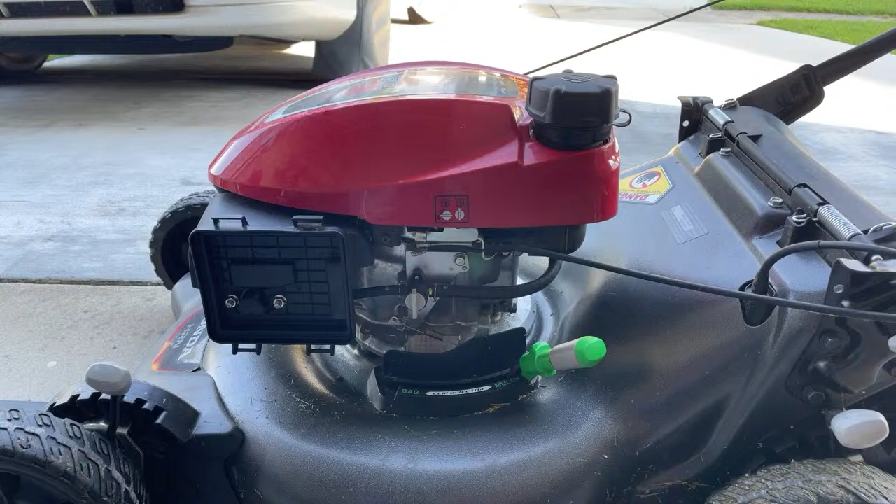Anyway, so here we have, I believe it's a 2020 Honda lawnmower. The engine is a GCV170. This is the engine, brand new for 2020 and after for Honda. It's the larger, slightly larger engine than the 160. It's got a bit more horsepower to it.

So this mower is the HRN216. That's going to be important a little later, as well as the model number I got here. And this is important too to keep in mind: HRN216VKA. That's going to be important because I'm going to show it to you a little later.

This is the old original carburetor that came with the mower. This is the one I drilled out with little tiny micro drill bits I found on Amazon, which solved the problem but made new problems. I think I drilled them out too well, just a bit too big, and now the whole thing is running too rich.

Now the other thing I need to do is take off this bowl down here on the bottom, if I can. I need to find a wrench to pull that bowl off, just to make sure there's no other gas in it. That's something else I didn't plan on, that's gonna take a little while.

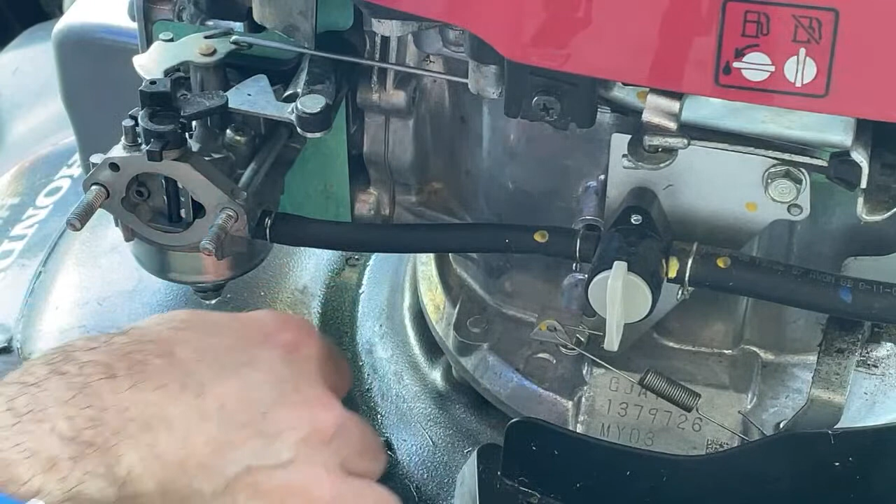I was trying to start this earlier before I started this video. I was trying to get all the gas out of it, run it out of gas, so it wouldn't be pouring out everywhere, but it would not start for the life of me. Not a clue, well, not really knowing why. It shouldn't be too much wrong with the gas.

I got it all sweetened up really well with various different cleaners and other kinds of lubricants. I was trying to get the spark plug and the piston all cleaned up from the built-up carbon and running rich. So well, maybe I did run it out of gas, there's really nothing in there, so you can see what's wrong.

Oh, I thought I lost you there. Okay, so there we go, couldn't see anything. Anyway, so that's the bowl I took off, there's really nothing in there, so maybe it did run out of gas. There wasn't really much in there, so maybe that's okay.

Anyway, now I need to get some pliers and take that off and then remove these. If I remember right, I thought I had a spring on here somewhere, a different spring someplace, I thought. Now I don't know what happened to it. There was a tiny spring somewhere, I remember there was a tiny spring that went to one of these, and now I don't know what happened to it.

I thought for sure there was a tiny spring in here. Oh, there it is, oh I see it now. Okay, so you can't see it, but there's a wire spring attached here. I thought that wasn't there, I couldn't see it.

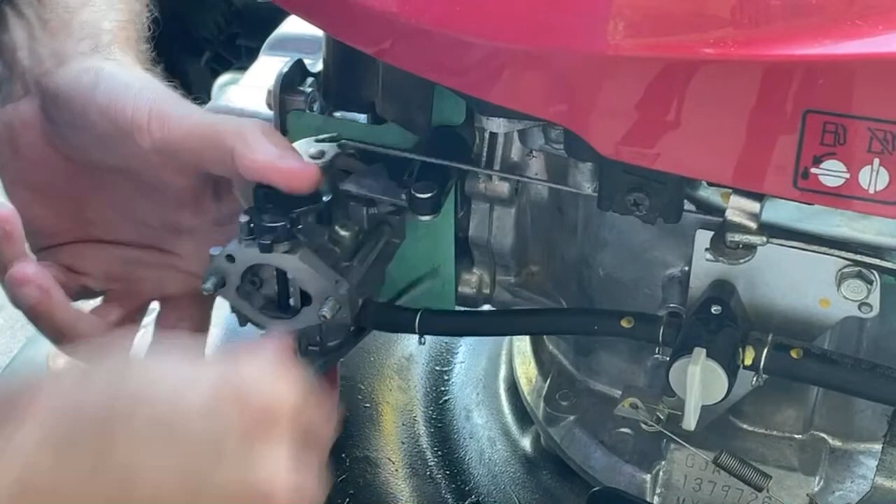Just wanting to, doesn't want to come off of there. But that's why this is a long walkthrough video, where you do have that time shift to fast forward through some parts, because it's probably going to take a long time. Anyway, so maybe I'll get that off here a little bit later.

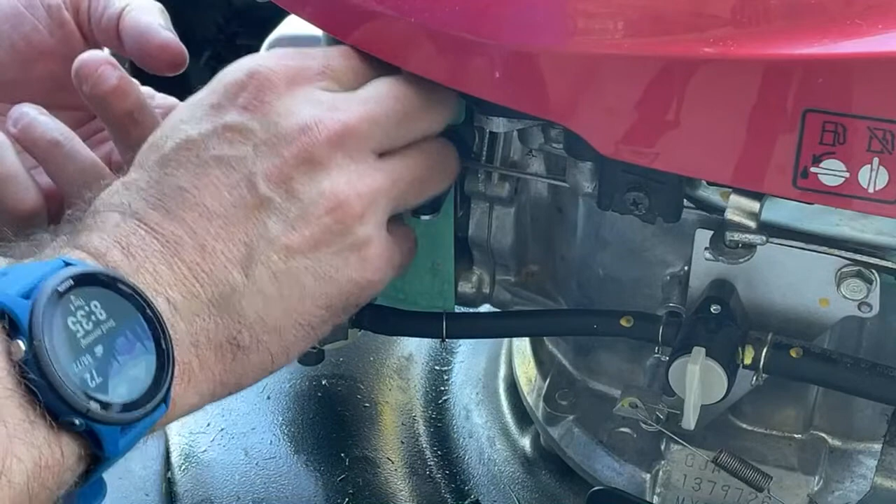Meanwhile, I need to remove this tiny little wire spring, if I am able to without bending it up too much. But I guess the other thing I can do is I thought maybe I could pull this off, but maybe I can't do that really well. So I got these other things on here.

Finally get that off. Now I can have a bit easier time getting that off, which I don't know if you can see anything. I guess you can, maybe a little. And this is not the best setup for trying to do a video. I don't have all of the necessary complicated camera gear. I'm just using my iPhone.

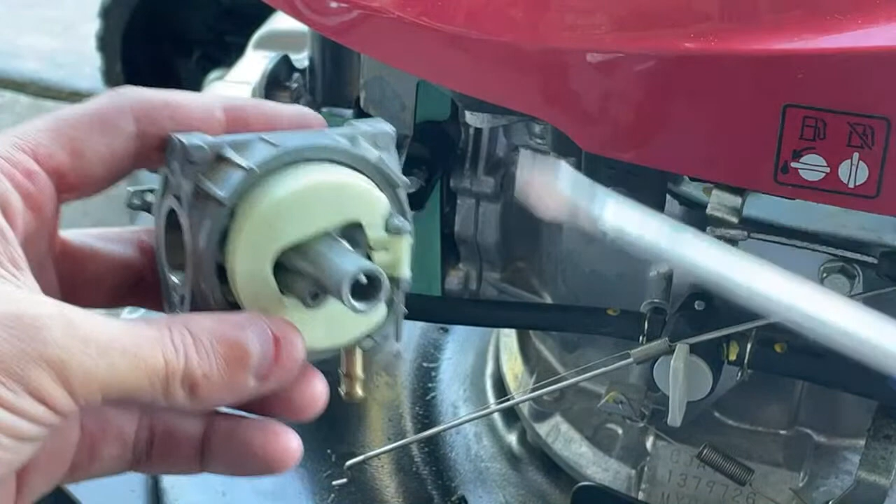So I took those off. Now, let's see, you saw me take that off. So here is the original, and I was gonna save this because I know that's good. The main jet, the emulsion tube I guess they call it, is way down there. So I was gonna take this, if it will fit, or this screwdriver here,

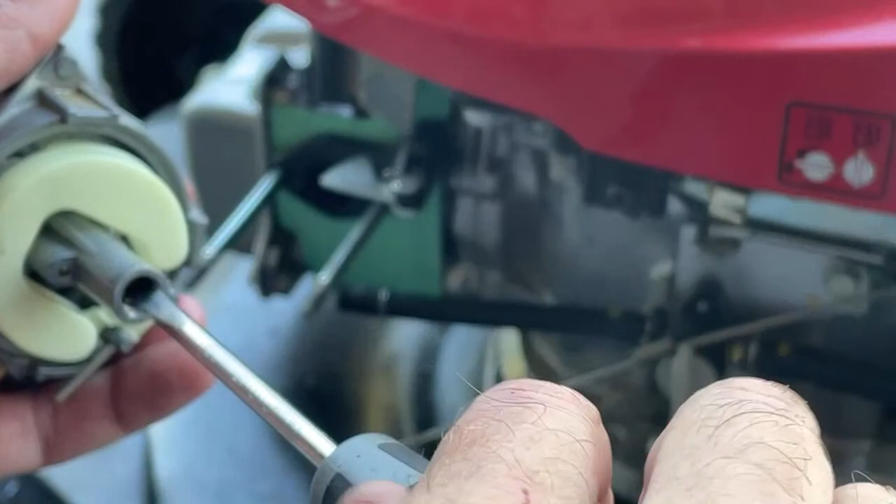And let's see if I can unscrew this and try to find out, if I'm able to find out, what the original main jet is. And I found out by looking on the new parts, that the number is stamped on the side. And I will try to show that here in a moment.

Maybe if you can see anything. You may not be able to see anything, it's just so bad. But just on the side here, on this main jet for this emulsion tube here, it goes through this main jet, and there should be a number stamped somewhere on the side.

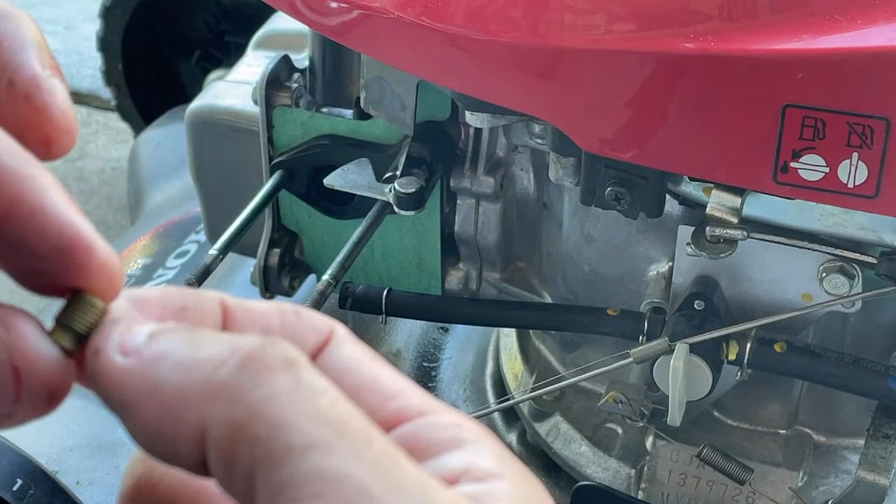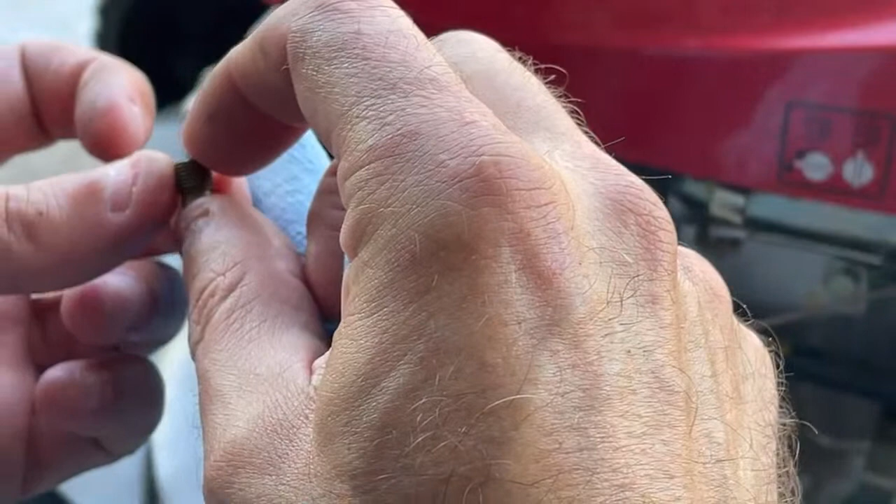And I may have to look at it in really bright light, and I may have to clean it up some. But I was wanting to see, I may have to clean this up with carburetor cleaner so I can see it. But I was trying to figure out what's the original jet number on here, and I may have to look at it in the sun.

But the other thing I can do too is I can look on the brand new carburetor I bought, which I'll show you. I can take that jet out and find out what the number is on there. But let's see if maybe I can take it outside with some better light.

But what I was talking about earlier is with this main jet, I think it's too small. I think they put in too small of a main jet, and I will show you how and why that is here in a little while. I think they got too small of a main jet where it's able to drop gas, but because it's too small, it's not able to keep it going, and that's where you have constant revving up and down that never quits. I don't know if it's any better or not.

But let's see if I can take you out here into the sun. Let's see if there's any way I can see. I may be able to see anything. Can't see anything at all, can you? Let's see.

I'm trying to find out if I can find out what the original jet number is on this. On there, I might be able to just see it so faint. Still can't see anything, can you?

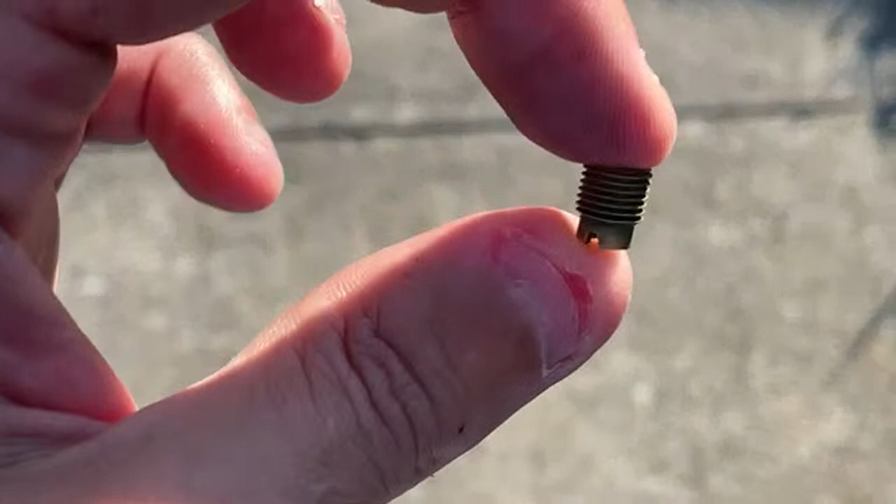So, sorry about that. Anyway, I think it's stamped, because it's like I'm trying to look at it with my glasses, but then you can't see nothing, but that's YouTube for you. Anyway, I think it's stamped on there somewhere, and I can't tell what it is.

I'm assuming this is a 65 jet, and if it is, then it's going to be too small and too tiny. It's like I have to take pictures of it and zoom in super close to see what the jet number is. So I can't see it, at least not from here.

And I know you're looking at my really bad chewed up thumbnail. I guess that's my cigarettes for you. I chew my fingernails really bad, and chewing my fingernails and chewing up my thumbnails, it's kind of like, I suppose, better than cigarettes, I guess, for me anyway.

But anyway, I can't see even in the sun. I can't see what that is, but I think it's right in there somewhere.

Right in there somewhere is the original jet number, and I can't see for the life of me what that is. But we're getting to be too long trying to find out, so I'll have to look at it later. I might have the same issue looking at the new carburetor trying to see what that original jet is too.

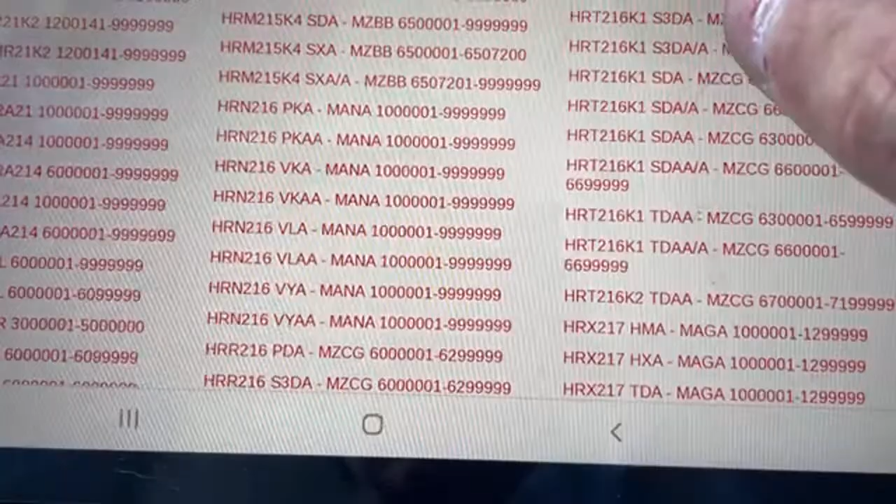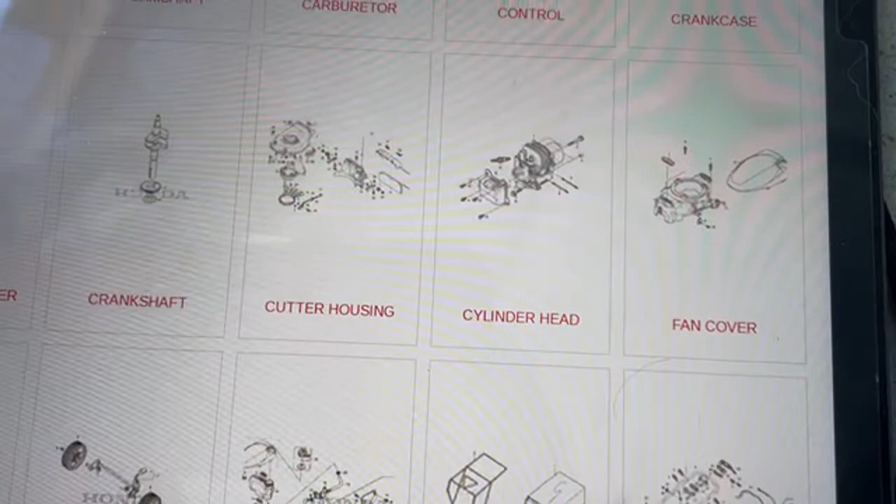In my situation, I have an HRN216VKA, so I'll choose that one. And here you have all the different parts you can get.

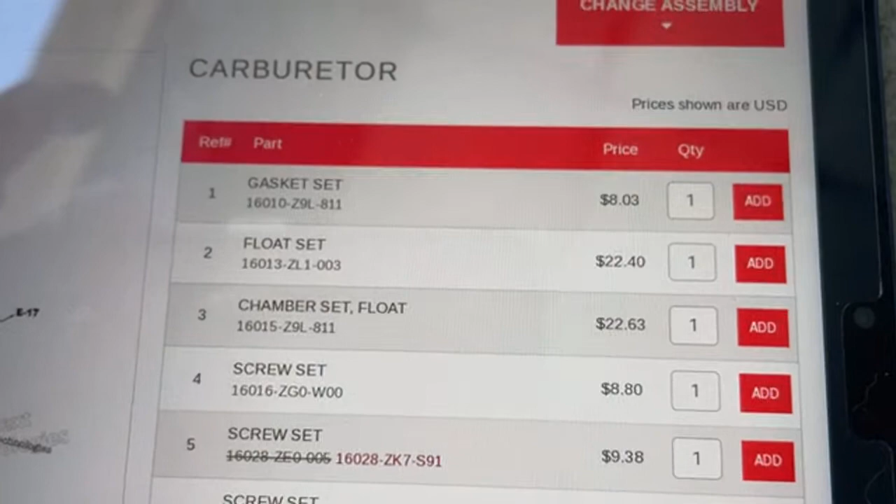So what I did was go to Carburetor, and here's the diagram for your lawnmower carburetor, with all the different individual parts you can get. I believe you can also buy the whole entire carburetor, that's what I did. Here's the carburetor assembly, that's what I bought.

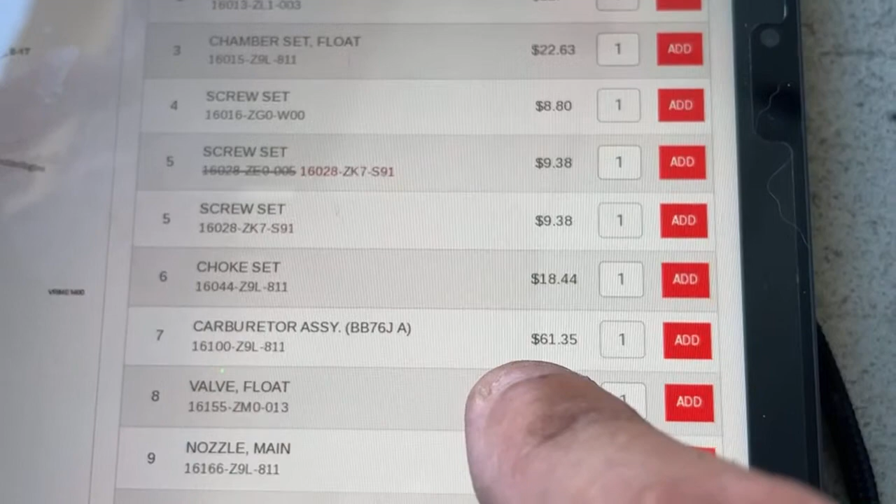At the time I purchased it, it was well over $70, but it's gone down in price a little bit. At one time it was maybe $40-something. Anyway, you have the whole entire carburetor you can buy.

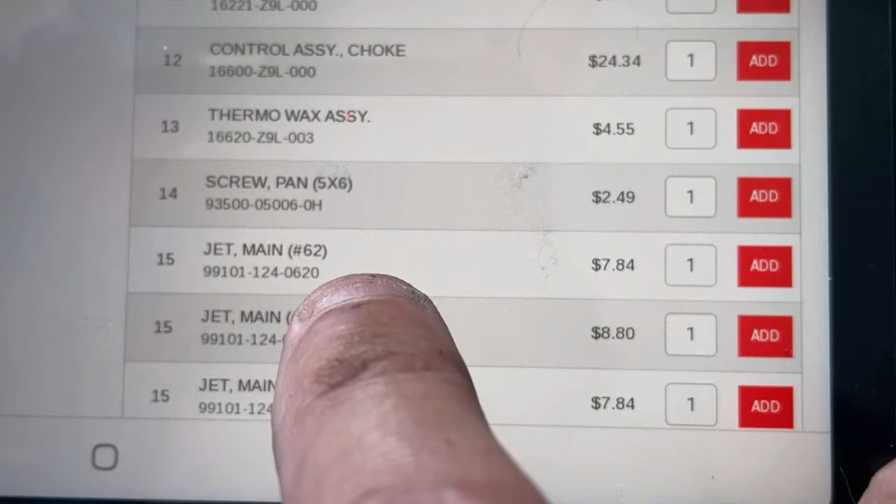Then you have the nozzle main, and then these main jets here. I mentioned 65 before, but I had that wrong. What I meant was this main jet 62, which I think is the smallest one, and I think that's the one they have originally in the carburetor, 62. I can never talk right.

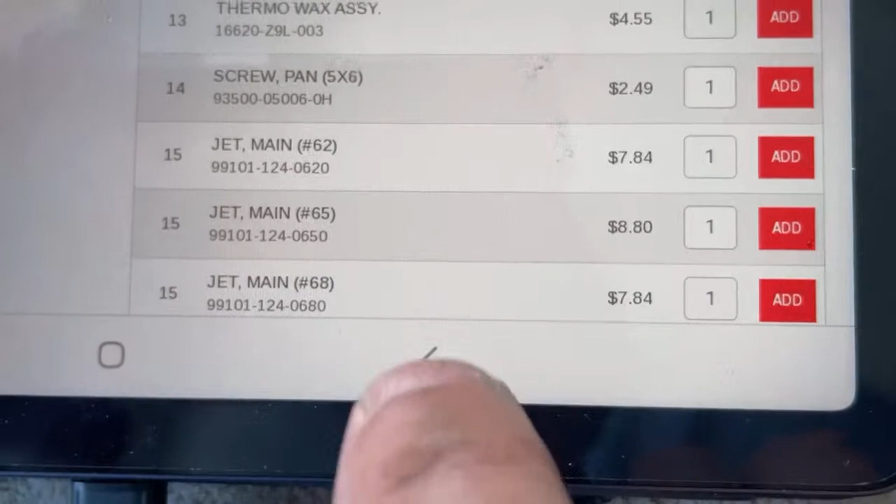I think that's too small, but I think that's what they have in the carburetor originally, 62. So what I was going to do was go to 65 and try it. I was trying to verify to make sure it really is 62 in there to begin with, but I can't see anything.

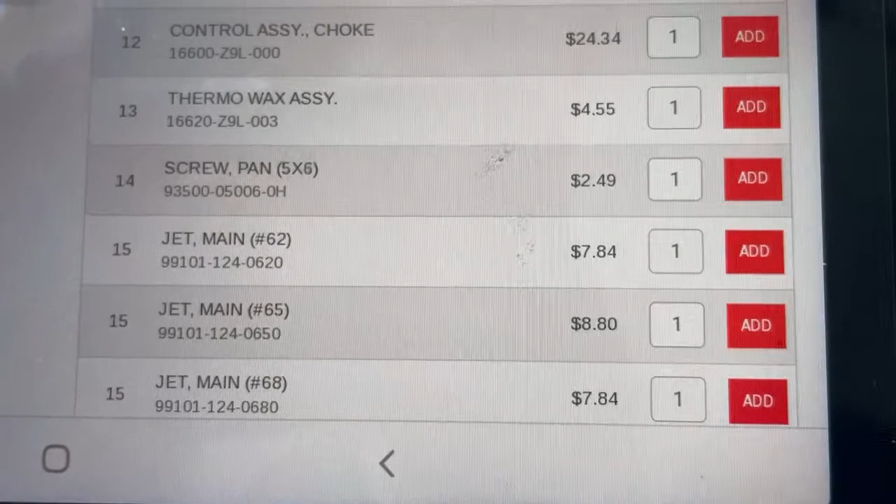So I was going to go with 65 and see if that will work, and if not, I can try the next bigger one. You can buy these three different individual jets for your carburetor, so maybe you can have much better luck getting your Honda lawnmower running without revving and fouling up the spark plug.

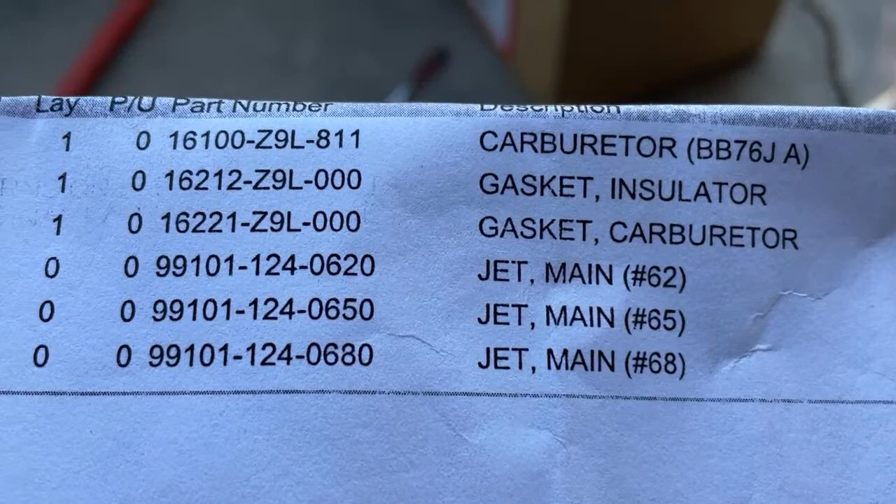So here are the jets I purchased. I purchased all three in case I needed everything. I've got gaskets, the whole carburetor, all those other things.

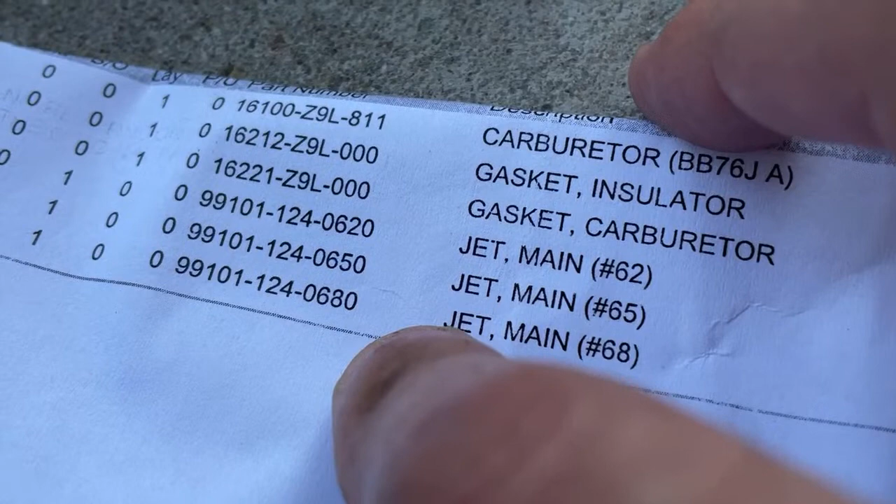So this is the really small little jet. You can line this up, line this number up, so you know which one you have.

So what we have here is number 62, that's the small little one, so I didn't want to start with that. I was wanting to start out with 65, the medium one. I'm thinking that's what I will need to have this run without revving up and down.

Anyway, so we've got these assorted jets I can try. I have the new gaskets I can put in there. It's always a good idea to put new gaskets in. Now it seems like I might be missing one.

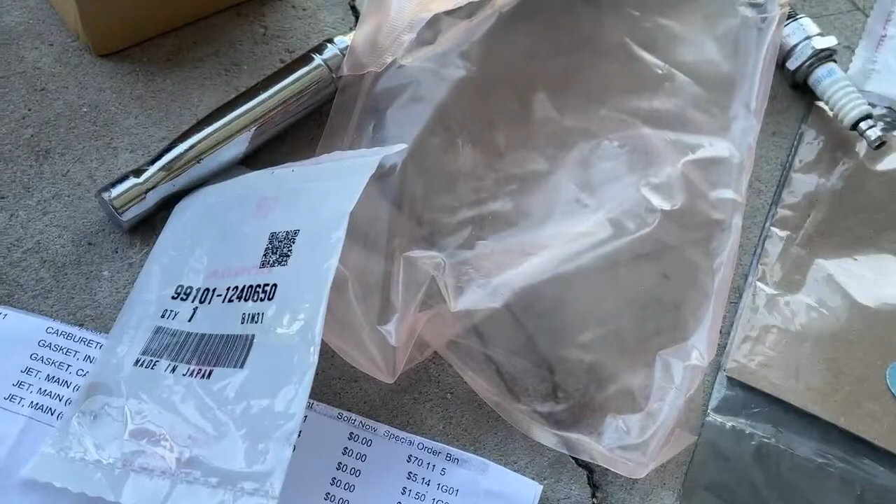I got the one carburetor, I got the one gasket I need but not the other. That's okay, I might have the other one in my tool drawer. I should have another gasket in my drawer of stuff that's going to go with this.

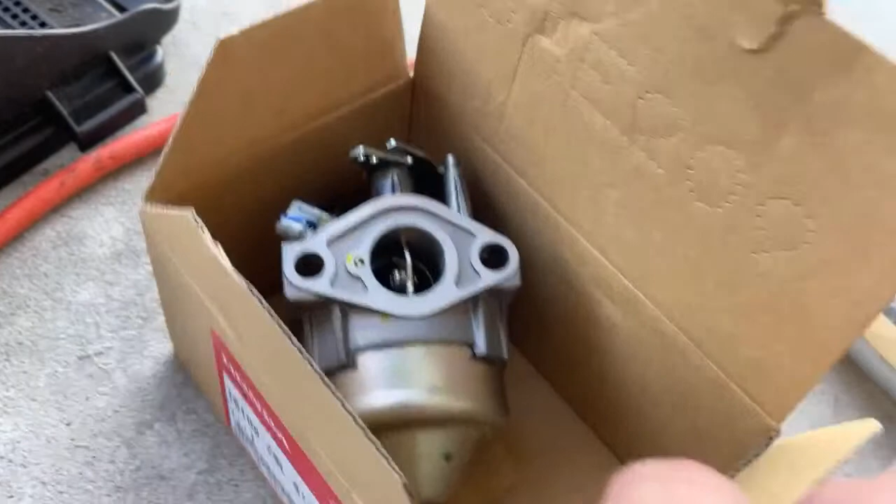This is made in Thailand. This is the brand new carburetor, automatic choke. I need to take off that bowl and get that other emulsion tube and original jet out, put in the little bit larger one, and see if it's all going to work. If I got the wrong gasket, I should have others in here.

I should have these other gaskets that will work. If one doesn't work, I've got some extra here I purchased previously that I can use if I need. I've got an assortment of different gaskets here I can use. I can't see what this one is with one hand, but we'll take that out and see if it's the right one or not.

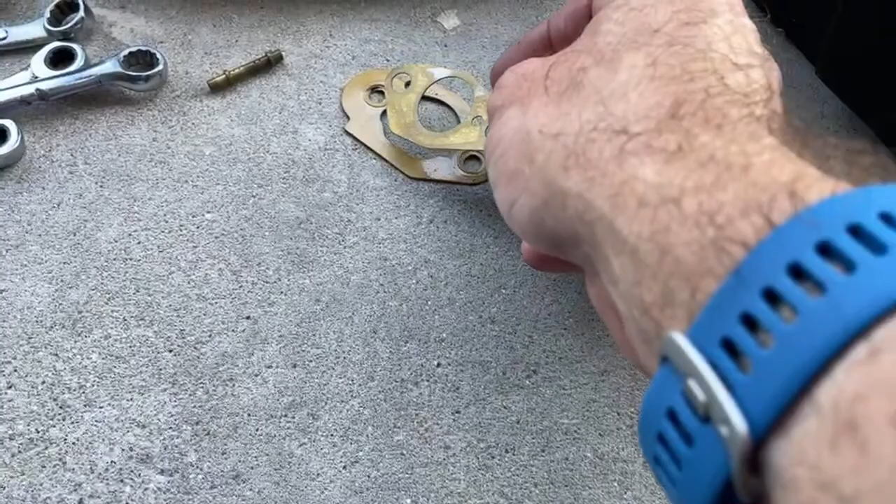I was trying to get new gaskets and I wonder if that's even the right one. But if all else fails, I can still use these other ones. These aren't in too bad a shape, still pretty new. I've been changing out carburetor gaskets, and these have little holes in them. Anyway, I'm gonna put you back here in the little holder thing.

So now I have no idea how to pause this if I wanted to pause it, but anyway, I don't quite know very well about trying to do live streaming here on YouTube like some people do.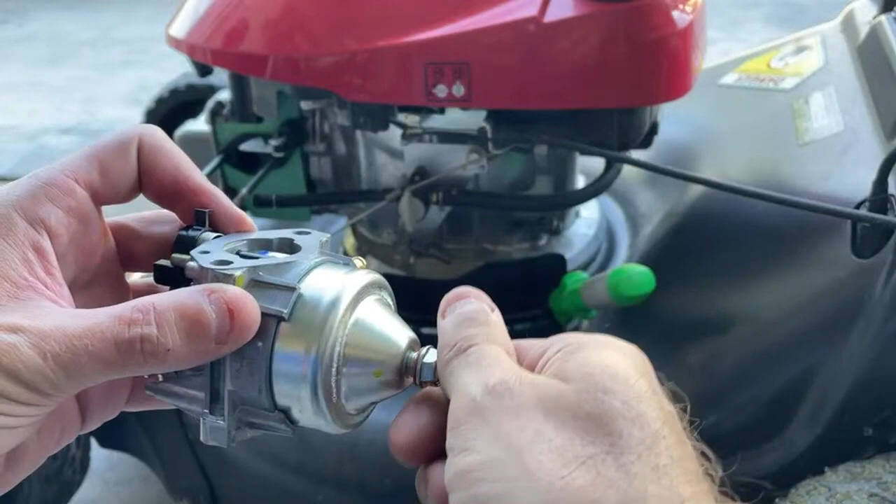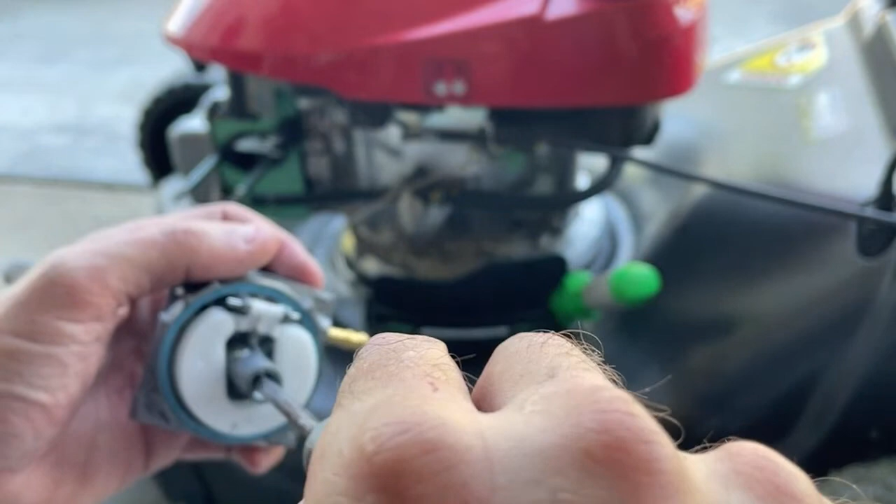So this is the brand new carburetor. I'll need to remove this if I'm able to. I'm not seeing anything in here to get a screwdriver in really well.

It is going to rain later, so I was hoping to try to get this done before it starts to rain.

I don't know if I loosened it up or not, I can't tell. I guess I did.

But I would like to see what this original jet number is, if there is one on here I can see. I'm thinking it's a small 62 main jet, and I think that's what makes it run real well.

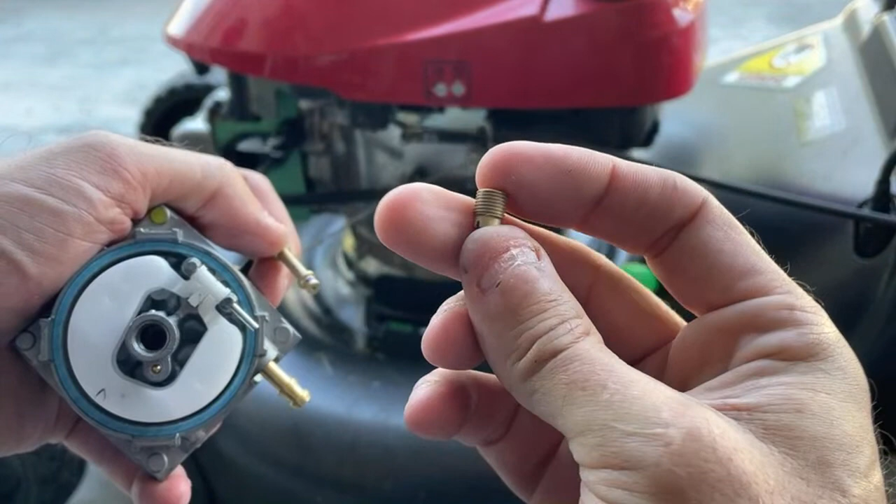I may not be able to see anything with this either. I have to get probably one of those magnifying glass things or something.

Now someone might say, well, you can always tell by comparing the two. I suppose I could do that. But it would be nice if it made the number a bit easier to see. I can just barely make out something on there, but I don't know what that is.

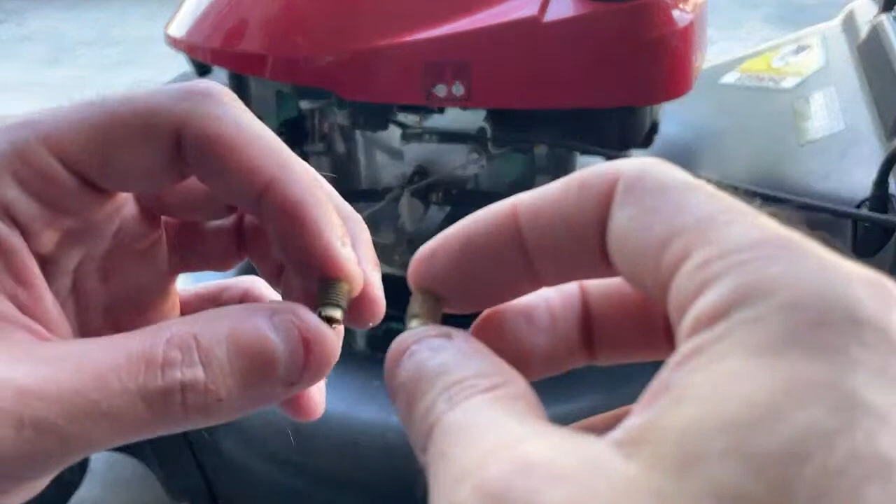Oh, let's see here. No, I thought there might be a number on that, but maybe it's nothing. I still can't see it. There was a number here on the very bottom.

I want to say it's a 68. That can't be right, huh. Well, if it's a 68, then that's the largest one. I thought it was a 60, yeah. Well, I know the 68 makes it rev up and down all kinds, so.

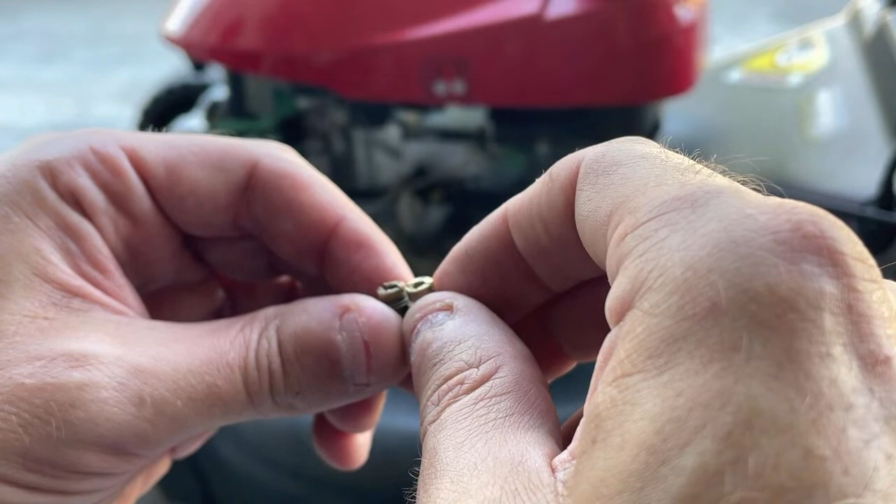I'm sorry you can't see anything, but this is the old one I drilled out, and this is the new one out of the new carburetor. I can just barely make out some numbers on the very bottom, I believe. The one on the left appears to say 68, and I can't see really well what the one on the right says. It might also be 68.

Well, I know this. I was assuming or guesstimating that the 68 jet would be the largest one, and I know that revs up and down. So I thought, well, maybe I'll need to go with one smaller, I suppose. It's just strange how it revs up and down and whatever.

I wish I could see it better, but it appears to be a 68. It's just you can't see hardly anything.

Well, what I can still do is, in that case, if it is a 68, I can go with the 65 and just see what happens.

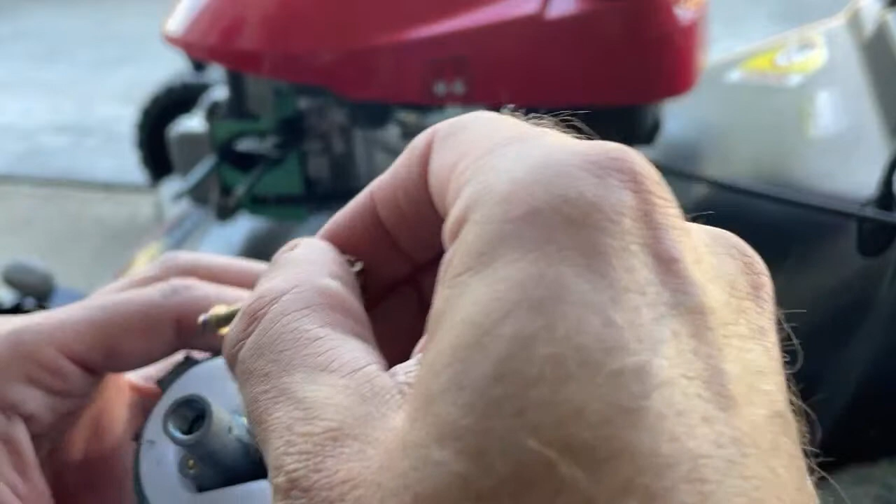Anyway, so let's put this all back together, I suppose. I think it goes like that. Hard to tell. Well, let's see.

What I can do is, if you're not sure, you can always look back on the diagram I have on my tablet.

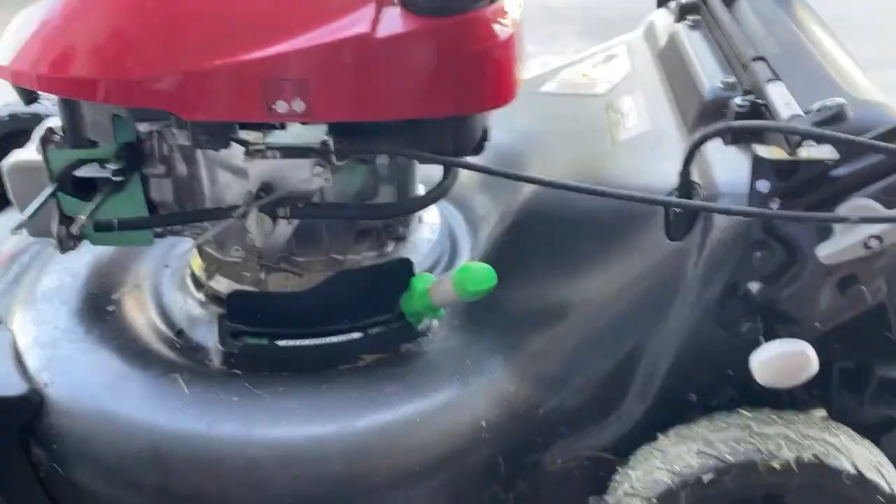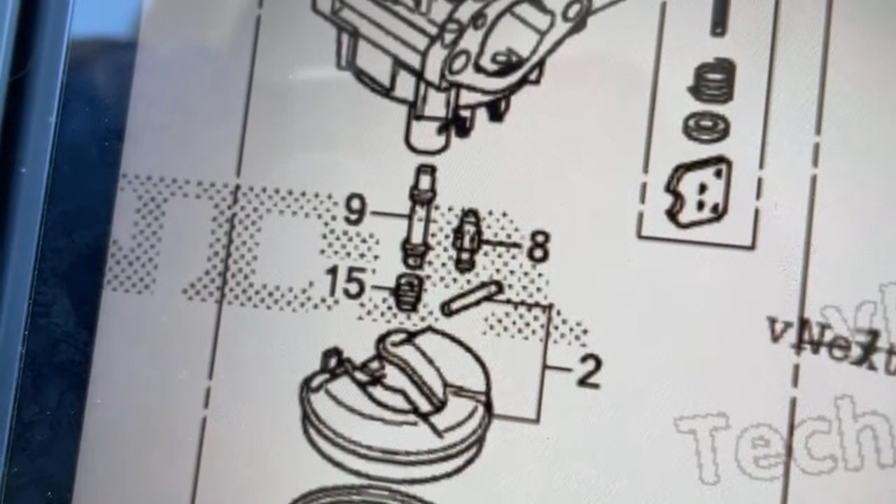So they don't tell you. I can't tell what they put on here for the original jet. It's like they don't tell you. So it appears as though the longer end goes in that way. Okay, according to that, so that longer end of that emulsion tube will go in first.

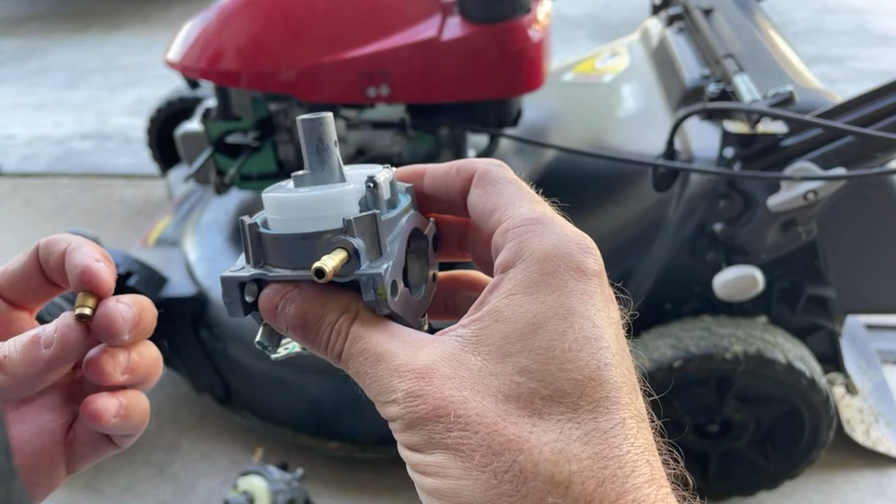And I'm going to put in the 65 jet in. I'm just a bit puzzled how I already have the largest size jet in there, and it's revving up and down like it was. So that's kind of weird.

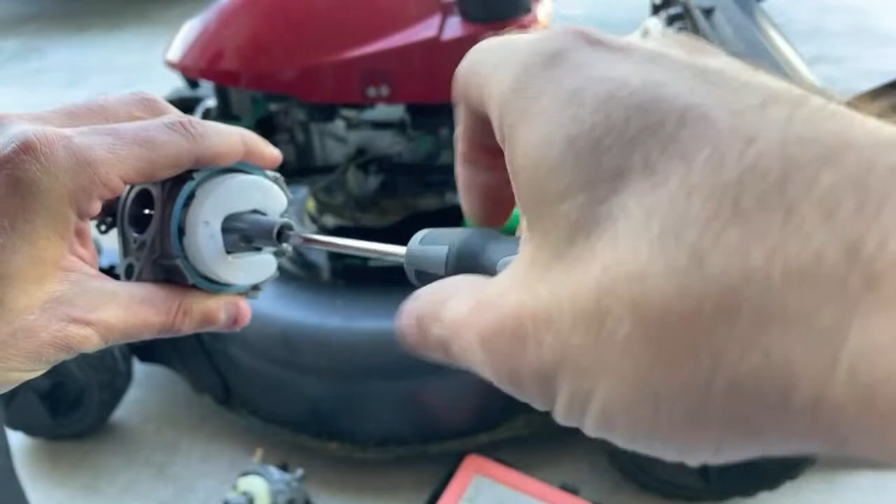I don't really have the right screwdriver for stuff. Well, like I mentioned, if this doesn't work, I got another one I can try and do that and see what it does.

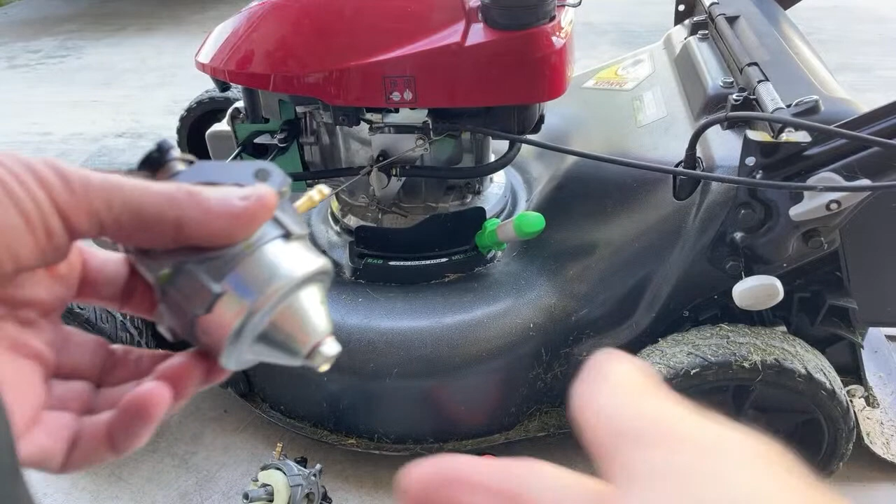So I got the other jet in there, and I know the other one's gonna rev up and down. So I want to try something a little different from what they had in there originally. It appears as though from the original carburetor, they already got the 65 jet in there already, and I know that revs up and down like crazy, so I want to figure out a different way to make this happen, so we're not doing that all the time. So I need to tighten that up, tighten up this.

So I got it on there plenty snug. So now let's see if I can get my gasket on there. Let's see if I got the one I need.

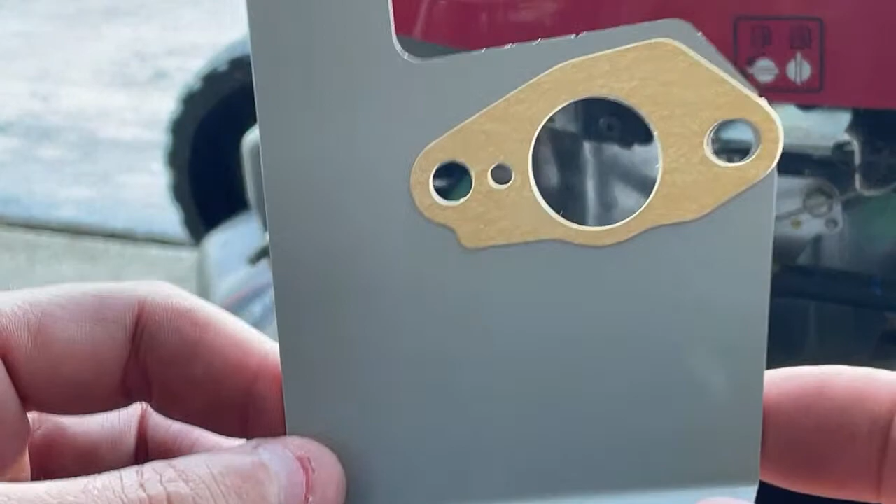Well, maybe I don't think. No. I don't quite have the gaskets I need. I mean, I do have this big thing, but I wouldn't know if that's gonna fit on there real well.

And I still need to put the other gasket on here. Or I think maybe I don't have to. It's gonna get on that plastic thing. I guess I can try that. Just have to get it lined up properly.

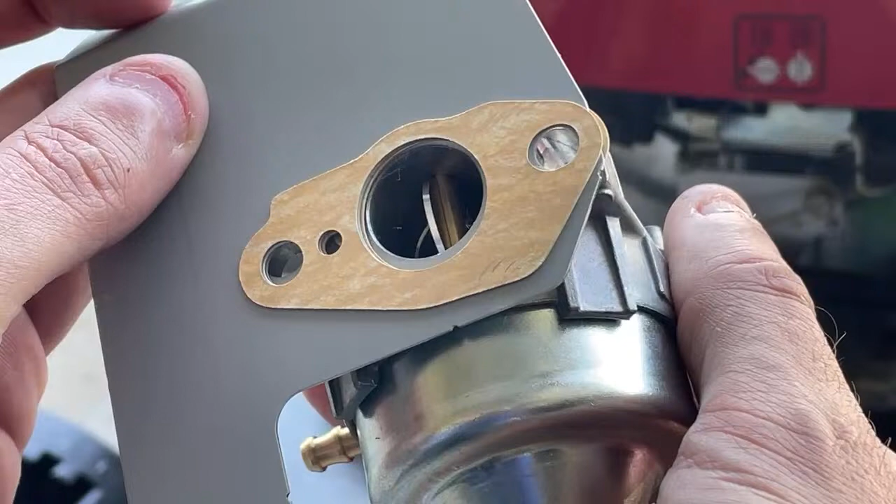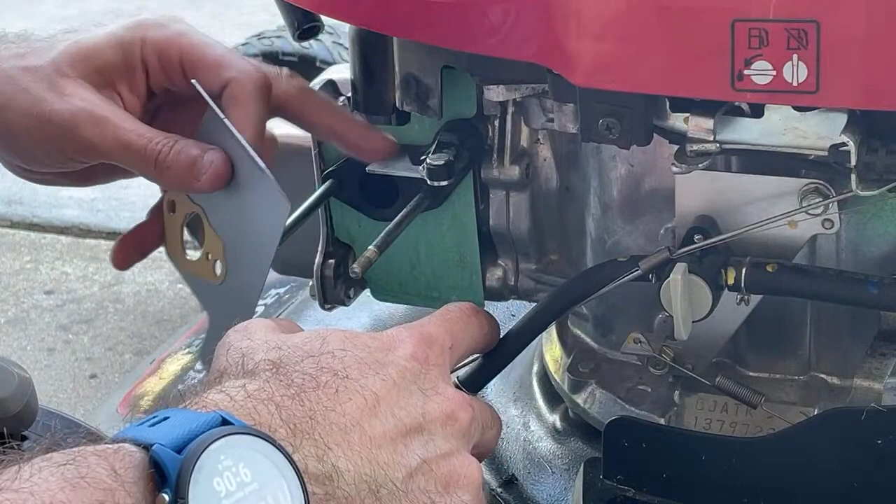I can see if that will fit. Maybe it won't fit on there. I don't know, let's see. Probably not going to work. It's going to be in the way. So that's not going to happen. So,

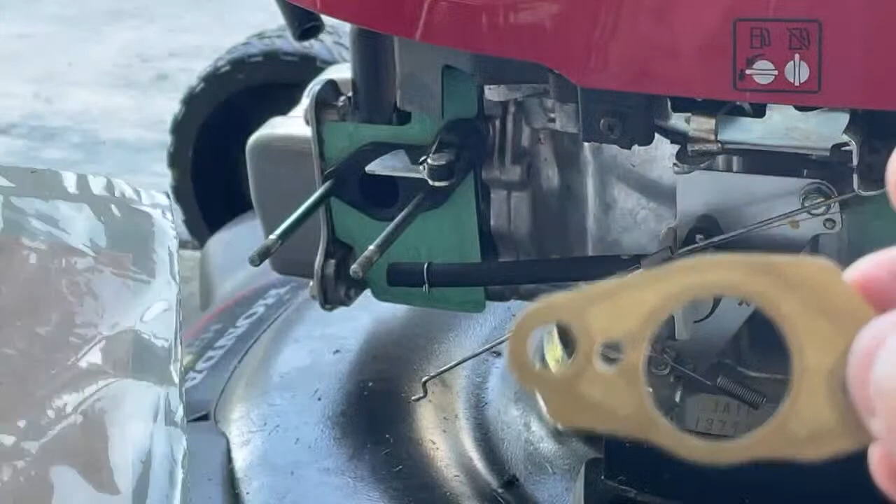you know, I do have this other gasket that doesn't have the hole in it, and maybe nothing says it absolutely has to have a hole in it, but maybe I can use this one and the other existing one, because this isn't all that bad a shape. It's still relatively new, so I can maybe take this one out. I thought I had enough gaskets, but

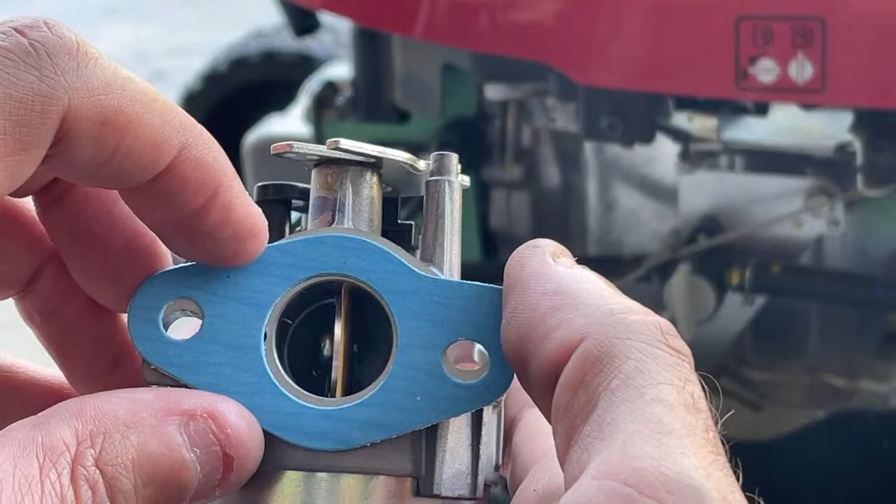like that. I think. Yeah, I feel like that will be okay like that.

Now I need to put on my little wire controls on there. Put on these little things on.

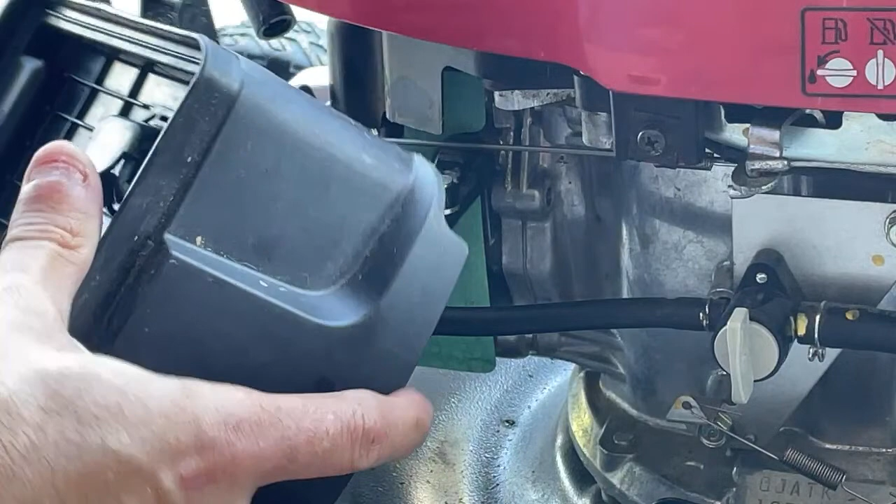allow it to work without revving and fouling up the spark plug. But I'm surprised to find out it already had that 65 or 68 jet in there originally, because I thought it'd be the one that'd be too small. So I hope you can still see everything okay.

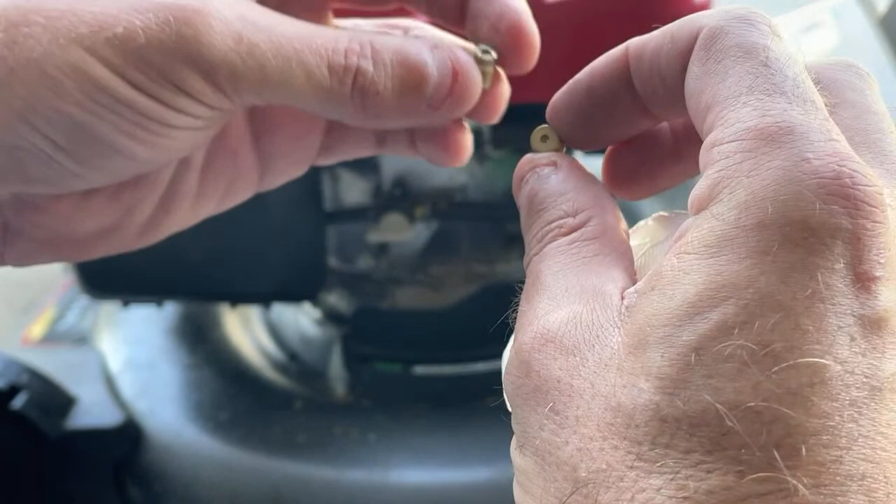Now this one here is a 62. I can see on the side it's a 62, and this other one on the left is a 68, and you really can't tell by looking at them any real difference in size. Looking at it through the light, you're not going to be able to really tell.

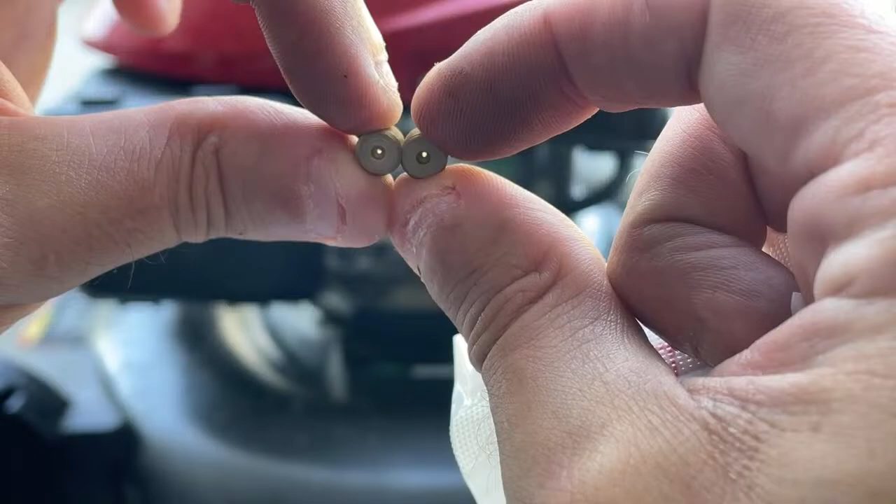But maybe it goes the other way, maybe the smaller number is a larger jet. Sometimes that happens. This is a 68 that I took out. This is a 65 here. Or let me make sure - 62, I mean, keep confusing everything. 62. So now I put in a 62 jet in there. That's what I replaced it with. I replaced it with a 62.

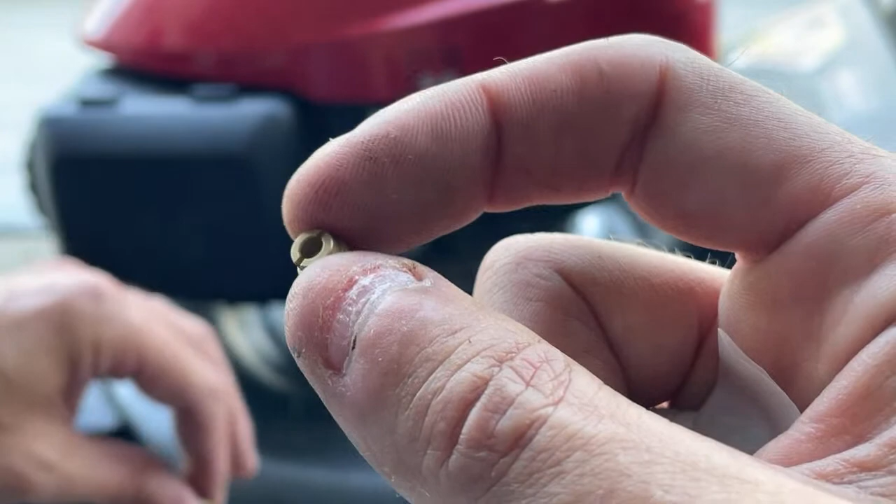Let's see if that's going to run. If not, it still starts to rev up and down, I'll put this other one in. This one's a 62, and go with it and just see what happens.

But anyway, this is going to be a really long walkthrough video. I don't see any gas dripping out of it yet, so let's see if maybe this will start up and run half decent. I need to take it outside in case it's going to blow out lots of gas and exhaust everywhere.

It's going to be difficult trying to start this with one hand, unless I get my little tripod out. I'm hoping I'm not going to be standing there forever and ever cranking on the thing. I like to have it start within a couple pulls.

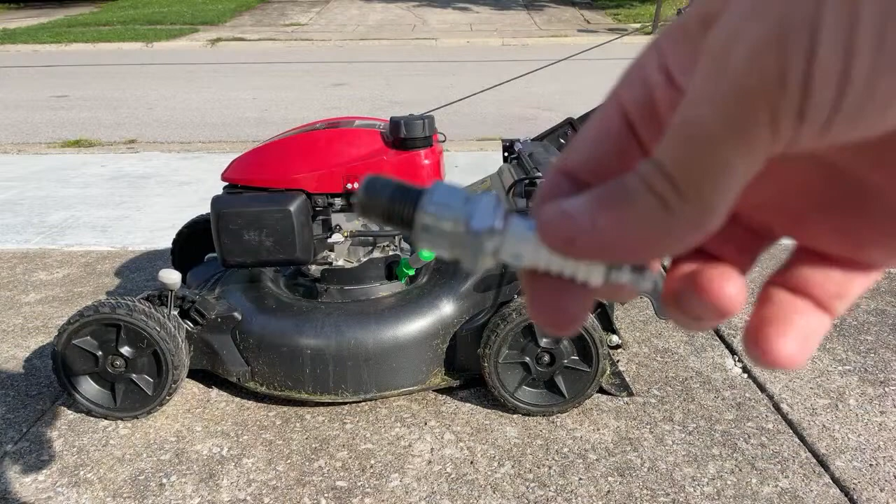Well, that don't look too bad. Can't see it real well, but that still looks pretty clean. But now it ain't running no more. Well, it's not starting now, but I do have a different spark plug I can put in there. I can try that maybe.

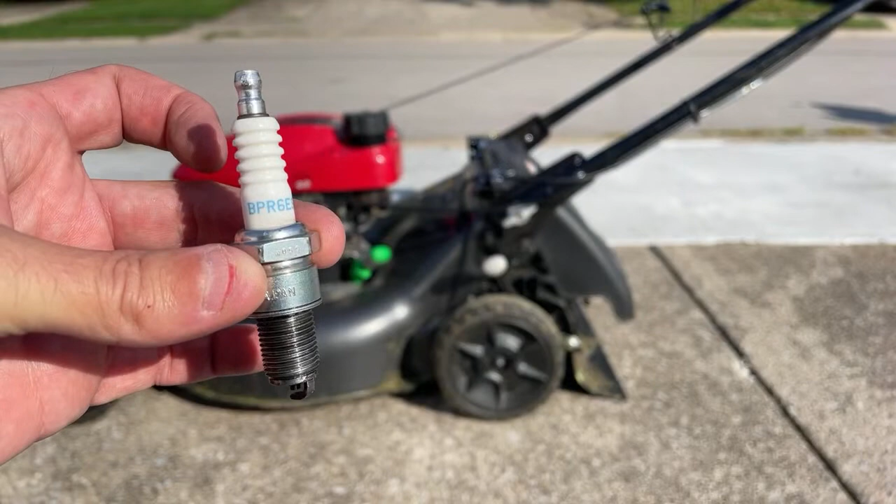It might be hard to see with all the blurriness, but I bought this at Lowe's. This is the NGK, got this at Lowe's. It's a BPR, B as in boy, P for Paul, R for Richard, 6, E for Edward, S. I bought this at Lowe's thinking maybe this will make it work or run a bit better.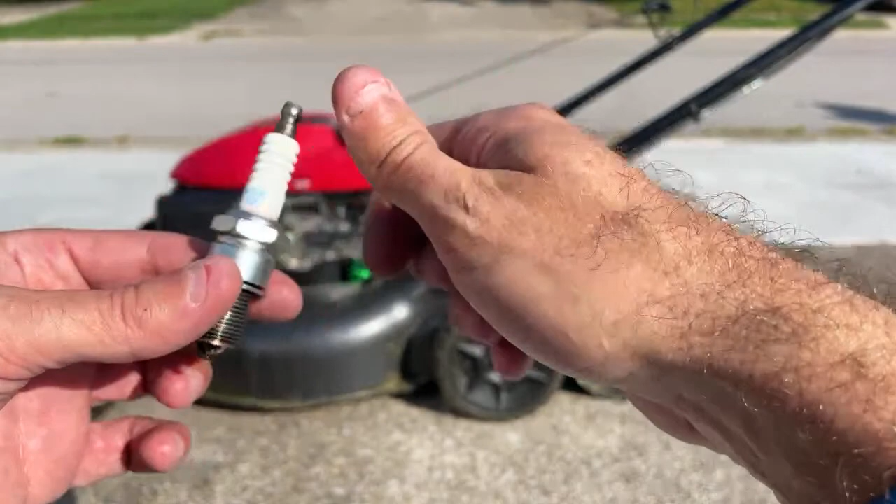But as you saw and heard, it didn't work at all, and there might be something wrong with the spark plug. So then I took this out and I replaced it with this other one, the spare I have. This is what came with the lawnmower originally, and this is also an NGK.

If you can see it, NGK, and this one is B for boy, P for Paul, R for Richard, 5, E for Edward, S as in Sam. So BPR5ES. As you saw and heard, it started right up and ran better.

So now we'll put this back in. This doesn't look really dirty or fouled up at all. It only ran for about a minute. But I can spray a bit more carburetor cleaner on it, get it a bit more cleaned up, put it back in and start it again to see what happens. Maybe it'll keep running longer and not rev up and down.

So it apparently, I guess, does not like the BPR6 spark plug. I thought maybe it might like it, but I guess not.

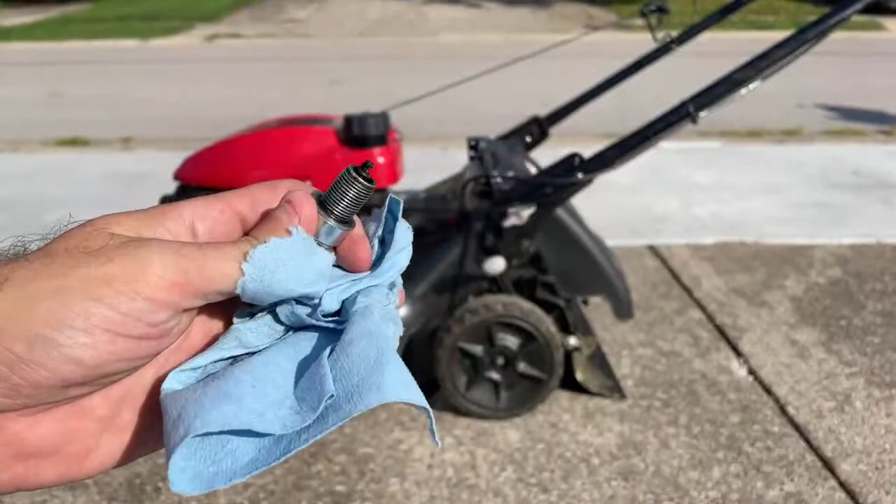So I'm going to get this cleaned up a bit better with that carburetor cleaner. I just get it on there really well. Make sure it's as thoroughly clean as I can get it.

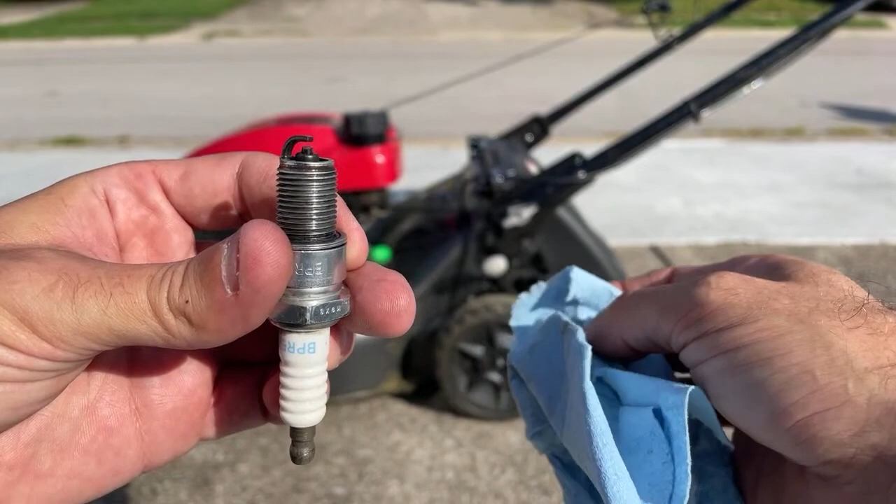And I might even take my little pocket knife, because I can never talk right, and clean out the inside and in between the gap there. But that does look properly gapped. It looks straight and gapped to me.

So maybe perhaps the other problem I was having for a little while was using the wrong spark plug. As I mentioned in the description, because I can never talk right for the life of me, I replaced the spark plug, which still makes no sense. I replaced the spark coil in it because that just quit.

So maybe that BPR6ES blew out the original spark plug coil, because there's no information, there's really nothing that tells you exactly what is what. You're thinking it's all going to run the same, maybe a bit better, but maybe not. So maybe in combination with the BPR6ES, with that original ignition coil, it blew it out.

So I replaced the ignition coil, and then you heard it popping and smoking, and then it just quit. There was no spark at all with that BPR6ES. So replacing it with this seemed to make it start and run better.

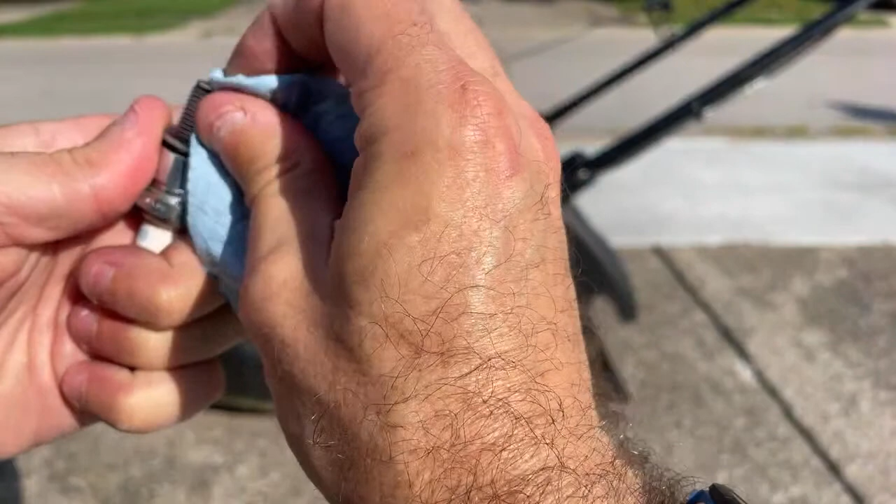So maybe I'll put this back in, it's cleaned up better, and see if it will run again and test it. Maybe do some mowing before it starts to rain. And also a little later I can go back to Lowe's and get another BPR5ES. It's probably due that I get another spark plug, so maybe I'll get another one of these at Lowe's.

So let's try it again and see if it will run. But the good news appears to be it's not revving up and down right away.

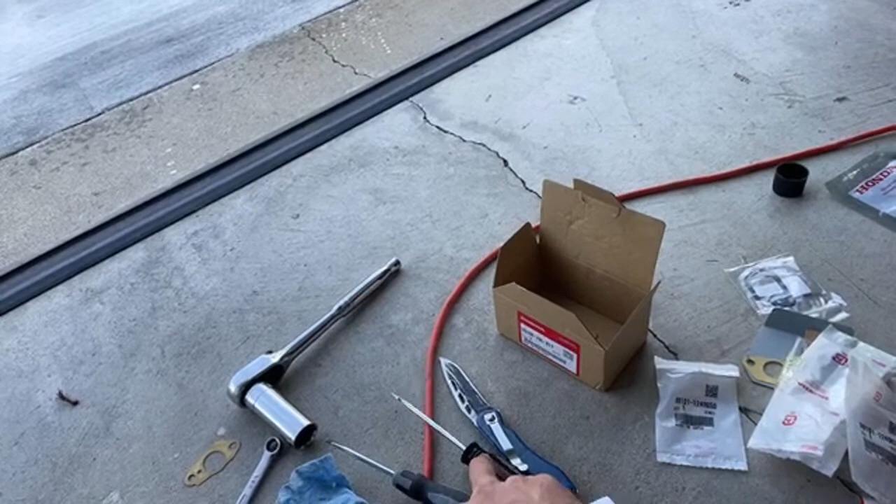I need to really give it a good test to make sure it's going to keep running. So that might very well be the solution for any of you still watching this video, or maybe you time shifted through it to near the end.

But apparently what I did, in summary, was this: the main jet 68, on the bottom of the page here, that was in the carburetor originally from the factory. I know for a fact this 68 jet will make it rev up and down like crazy, and it just never ends. So I changed it out for the 65 jet. I thought all this time that the 65 jet was in there originally, but it was actually a 68. So I changed it out for a 65 jet and put it all back together.

And it turns out it's important to use the correct spark plug. I tried with an ES6, and it doesn't like it. The ES5 that comes with the engine originally with the mower, that's the correct spark plug to use.

And there's no leaks. So I'm not gonna keep this. I'm just gonna probably take off this float and keep it, but that's probably the only thing I'm gonna keep. And then I will put this back.

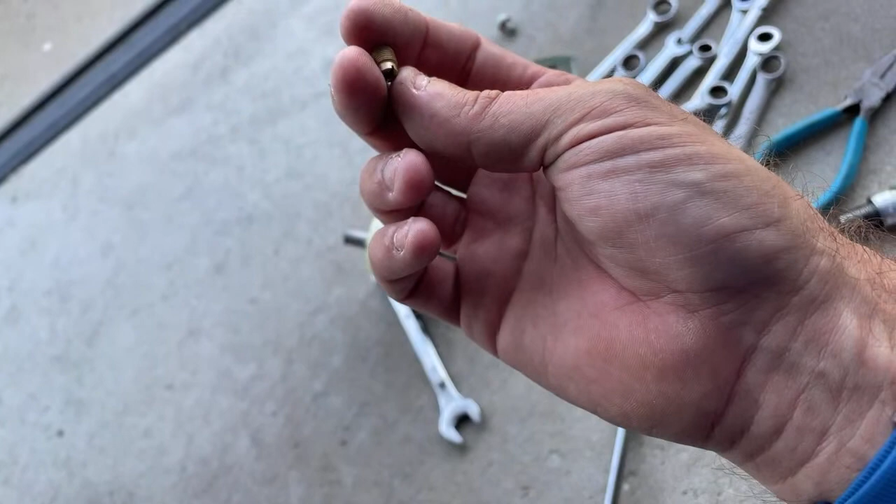This is the other new jet. This is the small little one, the number 62 jet. So if I needed to, I could put this in there, but I may not need to. If I was to put the 62 jet in, it's probably going to start starving for fuel or gas, I would think. Or maybe it might run too rich, allowing too much gas in. So I was wanting to...

Oh, this is the one I took out of the new carburetor. So I want to put this... now this, let me see, make sure I get the right thing here. This is the 68 jet I took out of the original carburetor, so that goes with that bag here. I'll put the 68 jet with this other one in there. So this is the other one I'll keep.

So that might very well work for you. I'm hoping it will, with everything falling over and just falling down. Anyway, so I'm hoping that's going to work for you.

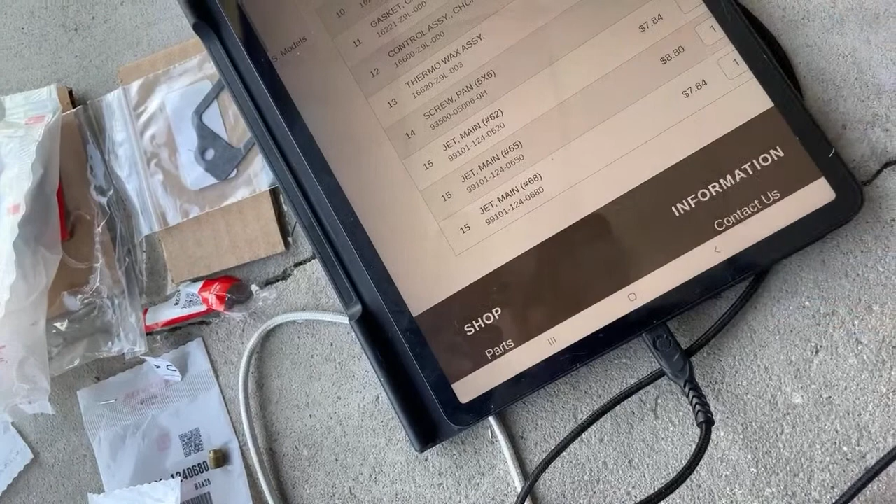And it is going to rain later, so I've got quite a bit more mowing to do, and we'll be going on for almost an hour and a half at this, and it does start right up. It does run, it's not revving yet. It might rev a little because it's got all that loaded up grass it's trying to chop up, but other than that, it's running. So I'm going to keep an eye on it.

I'll check the spark plug later. It's probably not run long enough to check the spark plug and show it to you right now, but I'll take it out later, check it, and if I need to, I can always go back down to Lowe's and get another one.

And in the meanwhile, I'll show you the gas I'm using in that lawnmower. I go to Lowe's and I get this.

So head on over to Lowe's, and it's a bit more money, but you get a whole gallon of this gas just for your lawnmower. This is ethanol free, and I'm finding out this is the other secret. If you're using that, even if you use that gold premium unleaded, it still has ethanol in it.

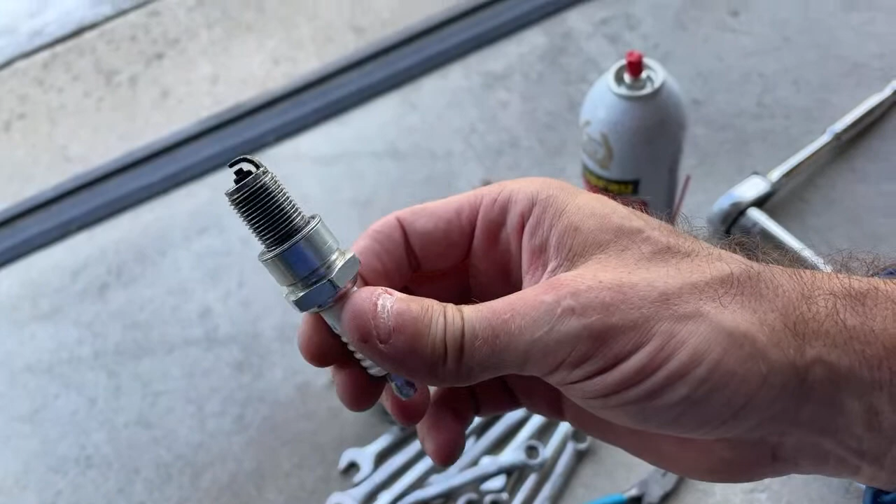And so I may have used this actually, not that small bottle, but maybe this. You don't need much of it anyway. So I was wanting to show you those things, hoping that will help you. So I need to get all of these things kind of cleaned up, and I probably can toss this out. This is the wrong spark plug. So I'll get a lot of these things all cleaned up.

That's pretty much all there is for now at the moment. I'm hoping that even with time shifting around through this long walkthrough video, you found some solutions that will work for you. And for some of you that are much more proficient with working on carburetors than I am, you could probably get all of that done in half the time. But it's just a matter of swapping out the main jet they give you at the factory for a different one that's going to keep it going instead of the revving up and down.

And you don't have to get micro drill bits like I did and try to drill it out, because, well, I found out the hard way. I made it too big. It made it run too well, where it's running really rich and smoky, and it was bad. But anyway, so I'm gonna keep on mowing here for a while.